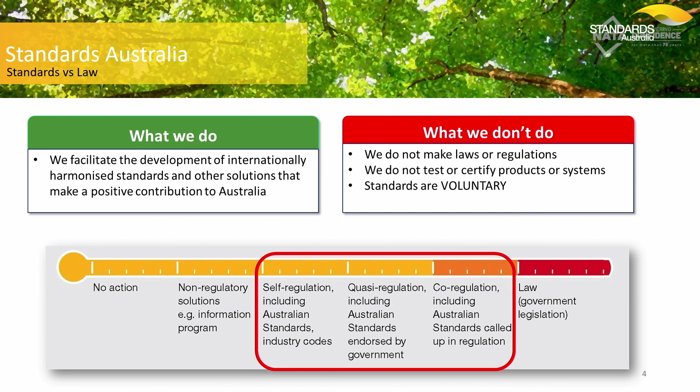For those who are unfamiliar, the National Construction Code is the building and plumbing codes of Australia. In it, we've got over 200 reference standards, the majority of them Australian standards and some international standards as well. This is a perfect example of co-regulation, where standards are actually embedded in regulation.

So why are standards important? The first reason is safety. Standards establish safety protocols for the production, usage, transportation and storage of hydrogen, and they ensure the protection of personnel, infrastructure and the environment.

Standards are also important when it comes to quality assurance, so they define specifications for things like hydrogen purity and hydrogen performance. This enables a reliable Australian hydrogen sector.

International alignment, and you'll hear me talking about international alignment a fair bit, but it ensures compatibility with the global supply chain and facilitates trade with our major trading partners.

And finally, market confidence. Standards instill confidence in investors, consumers and regulators, and by adhering to established standards, the hydrogen industry can build a robust and trustworthy market.

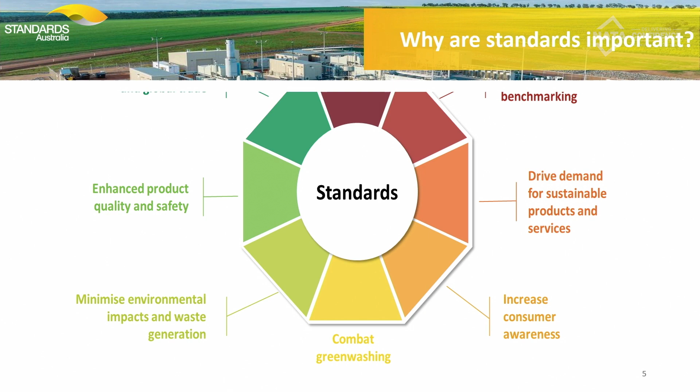So looking at the state of play with hydrogen standards in Australia and what we're doing at Standards Australia. ME93 serves as Australia's National Technical Committee on Hydrogen Technologies.

Now, ME93 also serves as a mirror committee to the International Committee for Hydrogen Technologies. This is facilitated by ISO, and this means ME93 serves two unique roles as that mirror committee.

The first role is that the experts on ME93 travel internationally. They represent Australia at the International Standards Development Table, and they actually sit at the table while the international standards are being developed and drafted.

And this is a segue to the second role, which is that once those international standards are developed, ME93 then review the standards to adopt them in Australia. There'll be a slide coming up which shows the hydrogen standards we've adopted and developed so far, and you'll see the overwhelming majority of standards in our portfolio are those that are adopted.

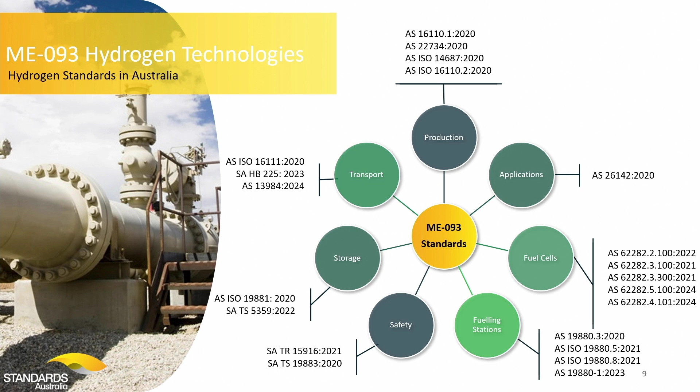I want to focus on one of our own specifications, something we haven't adopted from ISO. You'll see it under storage there: Standards Australia Technical Specification 5359. Apologies, I hate talking in standard designations and codes, but that's how our standards are referenced. The title is The Storage and Handling of Hydrogen.

Standards Australia published this document late in 2022, and it was Australia's first national hydrogen specification, and at the time it was also the world's first standalone document on the storage and handling of hydrogen. So a major achievement for Standards Australia, but also a major achievement for the Australian hydrogen sector. I think even in the international standards landscape, this really put Australia on the map.

There are some other critical standards being developed internationally, and I'd like to point your attention to this technical specification, 19870, which looks at the methodology for determining the greenhouse gas emissions associated with the production, conditioning, and transport of hydrogen to consumption. This is in line with ISO 14067 and the other ISO 14000 series you can see there on the bottom of the slide.

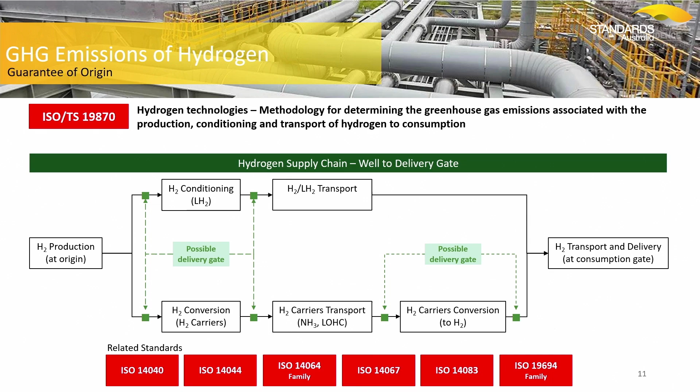Why this is important is because it dovetails quite nicely into the proposed Guarantee of Origin scheme, which is being designed by the federal government, which will provide a mechanism to track and verify emissions associated with hydrogen. So yet again, a perfect example of how standards can support proposed schemes and regulations.

The HyStandards tool. I'll spend a few minutes talking about this tool, and this tool could not be possible without the collaboration of both Standards Australia and the CSIRO. This is a central point of guidance for hydrogen standards in Australia, and it is a fairly comprehensive standards reference, and I'll have a graphic in a minute which just shows the breadth of standards we've collated for this.

The tool itself is actually hosted in CSIRO's Hydrogen Knowledge Centre, which was established by the CSIRO in 2021. This knowledge centre informs and develops a fairly robust hydrogen think tank here in Australia, and this tool will only add to that.

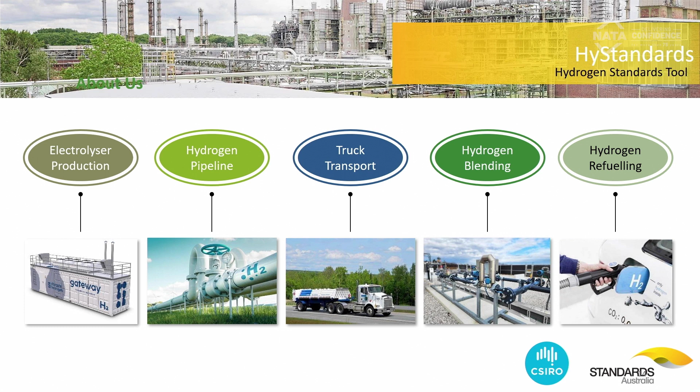With the HyStandards tool, we've gone for 5 scenarios, and these are the 5 scenarios that are most relevant to the Australian context. So we've got the electrolyser production of hydrogen, hydrogen pipeline transportation, road transportation of hydrogen, hydrogen blending, and then refuelling.

As you can see there, in collaboration with CSIRO, here are some of the standards or the areas of the standards we've collected. It's a fairly broad standards mapping exercise, and some of the standards here include Australian standards, joint Australian-New Zealand standards, international standards such as the ISO and IEC standards I've been referencing.

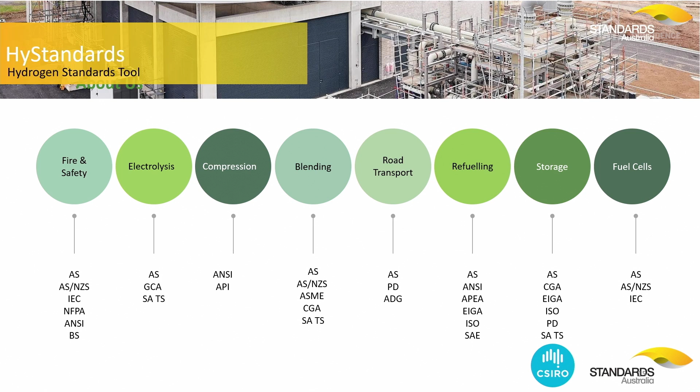We've also got some North American standards and some European standards as well. This talks to the importance of aligning ourselves internationally with other standards, because the majority of the standards that are currently out there are actually international standards themselves. I'll talk you through some of the key scenarios in this HyStandards tool, starting with the electrolyser scenario.

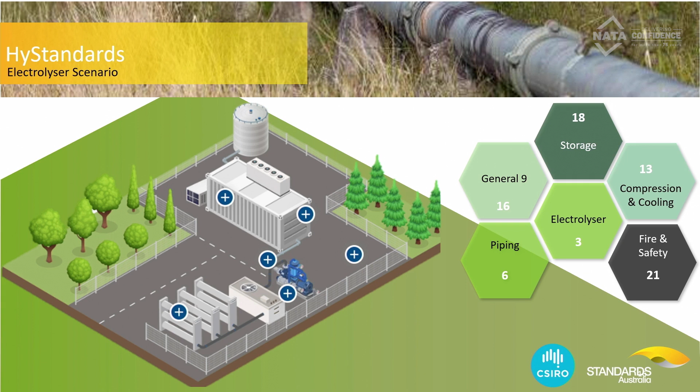As you can see, we've got the electrolyser itself, and we've got those two blue icons on the electrolyser, which identify some of the electrolyser standards that exist, but also some of the fire safety standards for electronic elements. From the electrolyser, the hydrogen is then transferred, it undergoes compression and cooling, and we've got the relevant standards there. Finally, the hydrogen itself needs to be stored, and we've got relevant gas and hydrogen storage standards from those standards we've mapped.

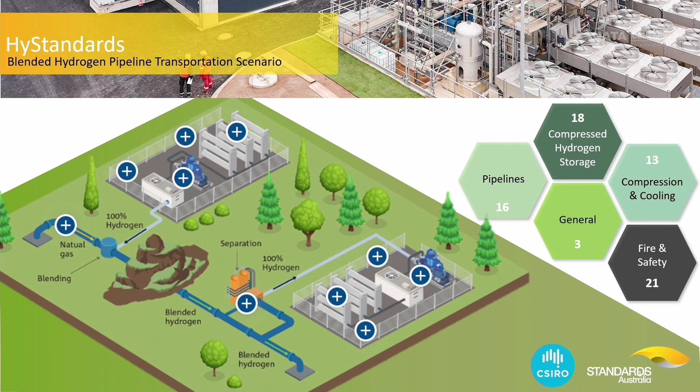Moving to the blending or hydrogen blended scenario, you can see the hydrogen and natural gas being blended and then separated. It then undergoes compression and cooling. So obviously with the different scenarios, we add and take away different standards depending on their relevance to the different scenario. The last scenario just focuses on hydrogen refuelling stations.

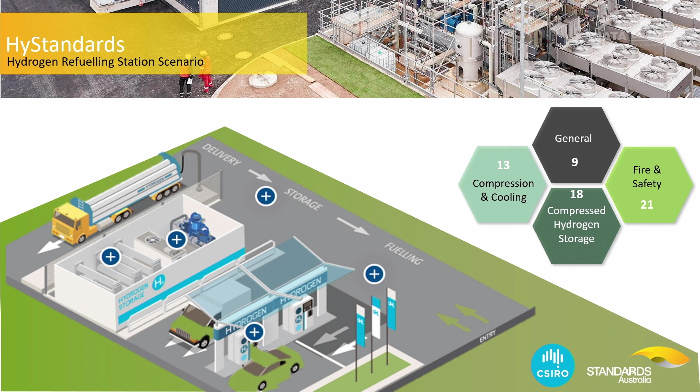So here you can see there's a focus on storage initially. We then go again to compression and cooling, and then there's some refuelling standards.

And I'd also like to zoom in on the refuelling scenario. We've got standards that look at some of the valves, some hydrogen car interface standards we've mapped, fuel quality standards, and other standards that look at things like hydrogen vehicle fueling stations, standards specific to those stations.

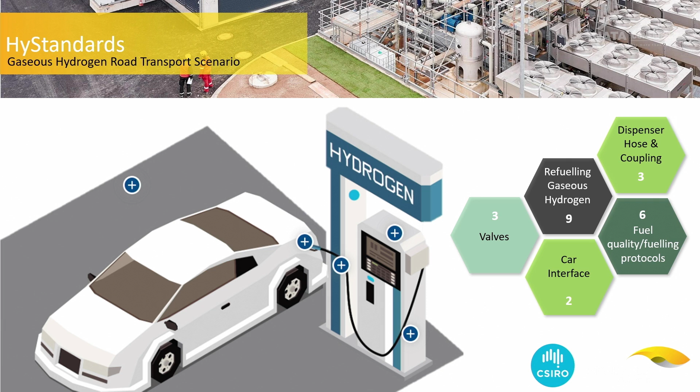So this is the HyStandards tool in a nutshell. It's important to note this is a first iteration of the tool. The tool will be updated as the sector evolves, as more standards are developed and adopted both nationally and internationally.

As I conclude, I'll have the QR code on the screen so you can access the HyStandards tool. Adopting and developing standards in Australia is not only essential for safety and quality, but also a strategic move to build confidence, drive innovation, and position Australia as a global leader in the hydrogen market. As I've discussed over the past 10 or so minutes, standards provide the necessary framework for a sustainable and prosperous hydrogen future, and they are a sure pathway to hydrogen accreditation.

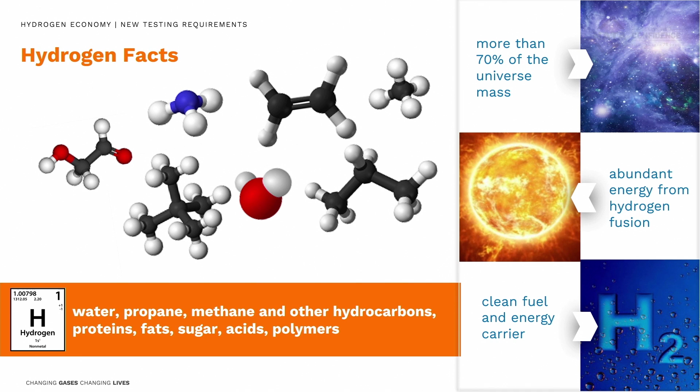So why are we suddenly talking about this? It's a very mature technology, very mature industry. It's used in huge quantities in hydrodesulfurization - refineries use hydrogen to remove sulfur from fuels. So if you want less polluting fuel coming from a car or truck, petrochemical companies use hydrogen to remove sulfur. The bad news for Australia is, for the last 20 years, we've been shutting down refineries, so there is less hydrogen in Australia in refineries this year than we had 10 or 20 years ago.

Ammonia production is one strong industry - we have a lot of ammonia production for fertilizers and explosives, for the mining industry, so this industry is doing very well. Again, it's the Haber-Bosch process, 80 years old, nothing new here. We don't have rocket fuels, but hydrogen is used as a fuel for rockets. Semiconductors - we used to have some semiconductor facilities, we don't have them anymore. We used to produce solar panels, we're not producing them anymore.

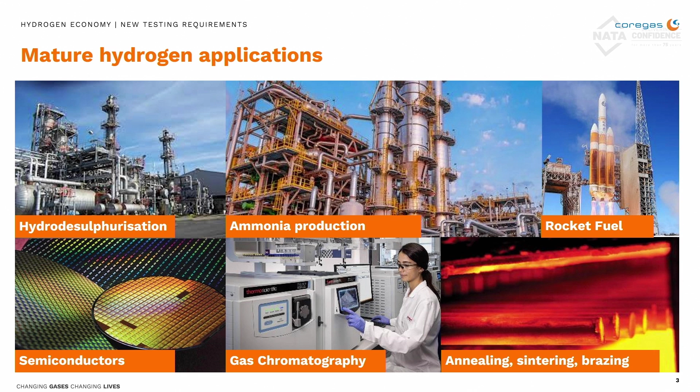Annealing, brazing, sintering - yes, we had it, but we closed the automotive industry. We are doing less manufacturing. However, laboratories and gas chromatography are still strong in Australia. So this is our major market.

So what's new? Why are we talking about this right now? Why the hydrogen rush? I think we can agree, after 10 years of debate, that we have global warming and the climate is changing. So as a response, different agencies, governments, and companies came up with the idea of decarbonization, and they see hydrogen as a path to decarbonize - not everything, but to decarbonize something.

One of the key areas where we should decarbonize is electricity, and we are doing very well in this space. We are putting in solar panels, we are putting in wind turbines. There's only one problem: how to store it. So that's where hydrogen comes into play as a clean energy carrier.

Different groups of interest are thinking about this - environmental change, energy storage, a greener grid, energy security, or economic development. Everybody has a different point of view, but I'll give you a clean example: South Australia. Electricity is owned by the state, so they decided to install a lot of solar farms and wind farms.

Now they have too much renewable electricity during the day, and sometimes they had to cut the roofs of the houses from the grid, because too much electricity is not good - it unbalances the grid.

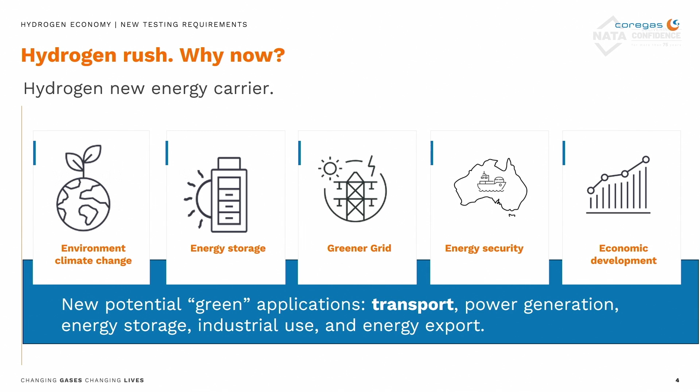Good luck - that's a very ambitious project, and I think it's a good example of how hydrogen can be used as energy storage and make the grid greener. And of course, economy - everybody's talking about jobs, jobs, jobs. So that's one of the key areas where the government is looking at hydrogen as a silver bullet solution for every problem we have.

State of hydrogen: I don't know if you heard about this, but $2 billion was allocated in last year's budget for the hydrogen economy. ARENA is managing that as a Head Start program. They got another $1.3 billion this year, with another $1.7 billion coming in the future under Made in Australia - hydrogen is part of it. On top of that, whoever can produce green hydrogen can get $2 per kilogram from the government until 2040. So guys, start making green hydrogen.

I don't want to dwell on this today because I'll be talking about testing of hydrogen, but I want to bring up another accreditation issue or challenge. If we're talking about green - we love the word green, it's probably one of the most abused or overused words right now. Everybody loves green. But our trading partners are moving away from the word green. They want to know the carbon intensity of the product they're buying from us - whether it's hydrogen or green ammonia, whatever - they want to know how many kilograms of carbon dioxide or equivalent gases were emitted during hydrogen or ammonia production. And that's where we are.

The Australian government and a few different agencies are working on something called a guarantee of origin, which is a very complex process. I hope we can have a discussion later about how to guarantee that something is green. I'll give you a simple example, and finish this guarantee of origin point here: if you bought a Tesla five years ago because it's a prestige car and it's green - that's great, congratulations. By the way, I'm driving an electric car myself right now.

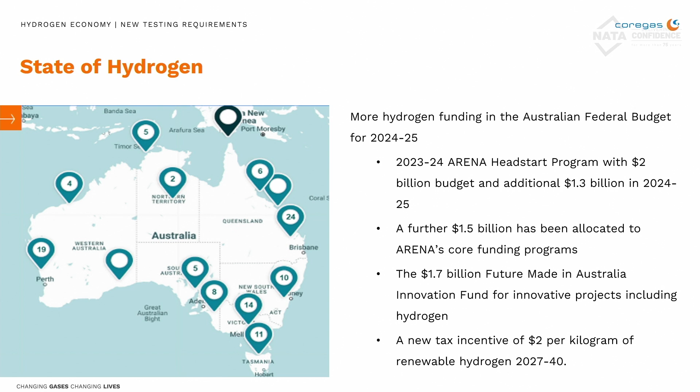That's why Japanese, Koreans, and even government are asking us, okay, prove how much emission is in the whole process of producing hydrogen. How are we doing? We are doing extremely well. We can congratulate ourselves. The carbon dioxide emissions are dropping significantly over the last 20 years.

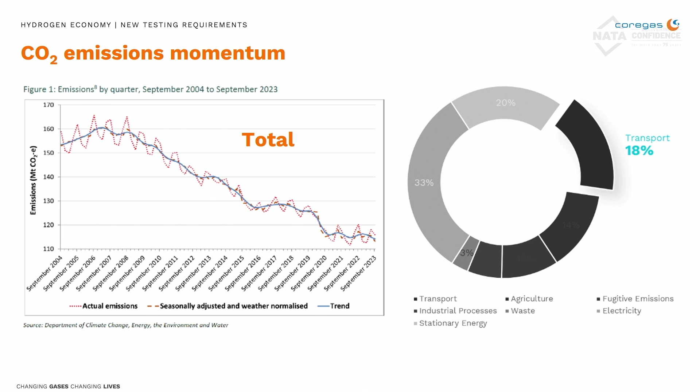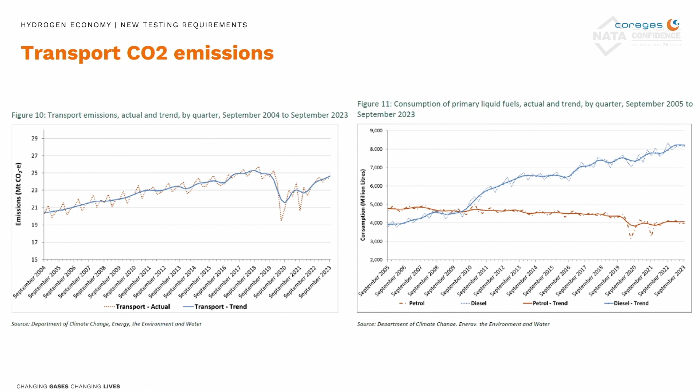Where we are not doing very well is heavy transport. This is diesel consumption - you see here we have significant growth. So what can we do? How can we change the situation? And this is - drums please - we have vehicles which are powered by hydrogen. We are calling them fuel cell electrical vehicles.

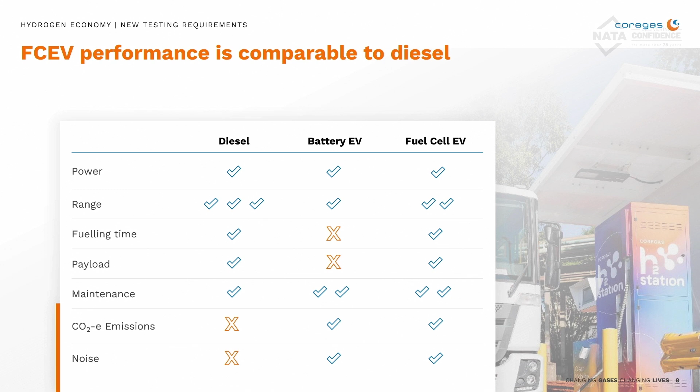This is a comparison of the benefits, cons and pros for different vehicles. As you see here, those vehicles are much better when it comes to emission in comparison with diesel. And they have much better refueling time and better payload than battery electric cars. So they're not really very good for passenger cars, because that's where the volumes are. But when you have a vehicle which is working many, many hours every day, or has to carry heavy load - like a truck going from Sydney to Melbourne - then the payload and hydrogen play an important role.

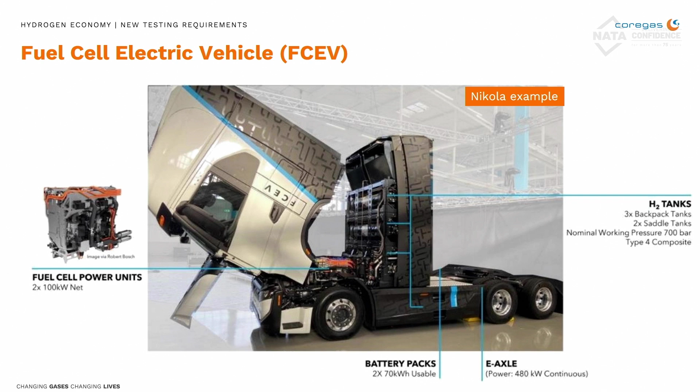So what we've done after that - we installed a hydrogen refueling system for Hyundai at North Ryde. That was the first hydrogen-powered car. Then we did funny things - we liquefied hydrogen and loaded it on a ship and sent it to Japan. And now the Japanese are working on a huge project, thinking, if this shipment was successful, maybe we can produce, let's say, 700 tons of liquid hydrogen per day, load it on a ship and send it to Japan. The project is around $10 billion, but that will be a lot of work and a lot of economic growth in Australia.

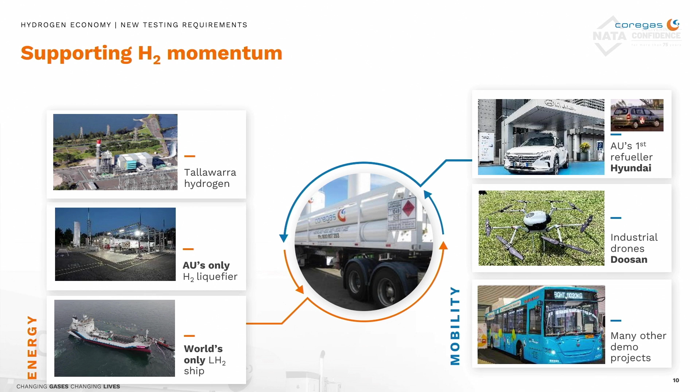So instead of talking about this, let's do something. We built a refueling station in Wollongong. I invite everybody who wants to see it, most welcome, it's inside the BlueScope site. I have to warn you, it's not much to see, just a dispenser. This is not magic, not a NASA rocket going to the moon. It's just a simple dispenser, nicely painted orange and blue, and a guy comes every day refueling the garbage truck.

They started in October. So the garbage truck in Wollongong is quiet because it's electric, zero emission, water is coming from the pipe, and it's picking up 1,200 bins every day and climbing Mount Ousley, if somebody knows this area around Wollongong. So I would say good demonstration.

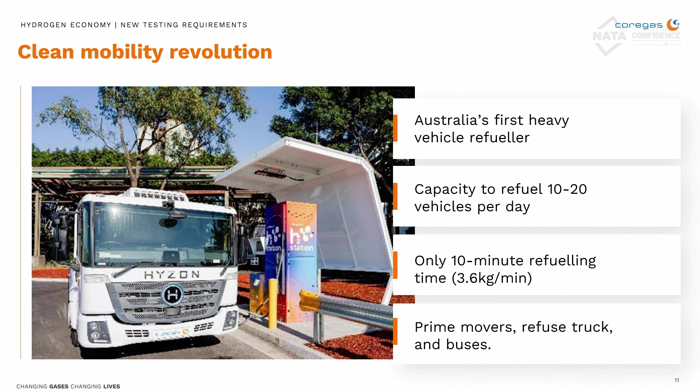And now I'm asking myself, what am I doing wrong? Why do we have only one? There are five under construction, but by the time they're installed, there will be another couple of years. So why are we doing wrong? Why can't we get those things moving faster?

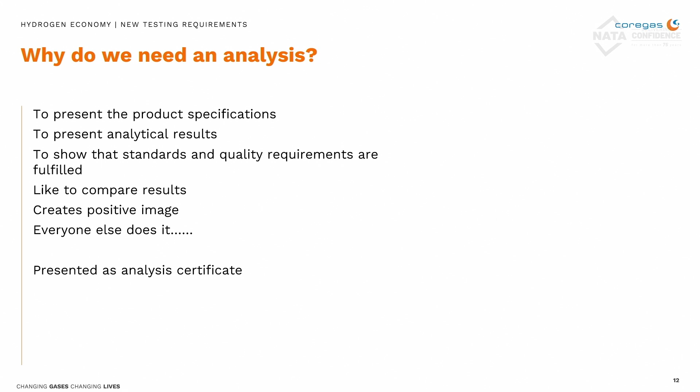Okay, analysis. Why are we doing analysis? This is a tricky one because it's for a probably bigger audience here. We have to present product specification and analytical results for all those industries shown before - ammonia production, burning, fat hydrogenation. The quality of hydrogen wasn't really that important before; 99.9% was fantastic. But now coming to mobility, suddenly there are critical impurities that can destroy the fuel cell. So we want to compare results, and everybody else is doing that.

So here, this is standard - Australian standard, I would say a copy of the international ISO standard. It's changing all the time, but this is some version here. As you see, currently we were supplying the past product on the right side, we call it 5.0, which was 99.999 purity. Now fuel cell heavy vehicles require only 99.97. But in comparison to what we've done in the past, where we had to analyze 3 components, now we have like 15 or 20, and some of them are extremely difficult, almost impossible to analyze, like sulfur at 4 parts per billion level.

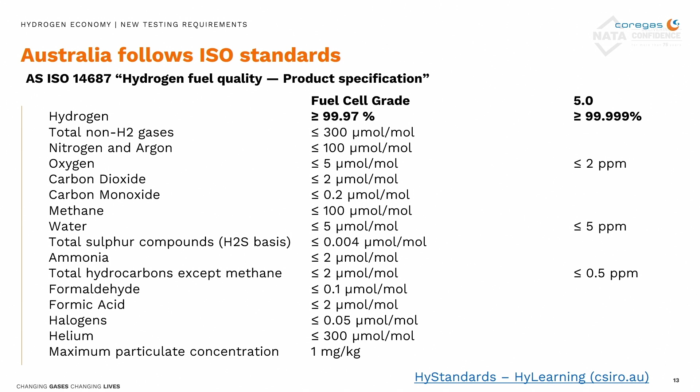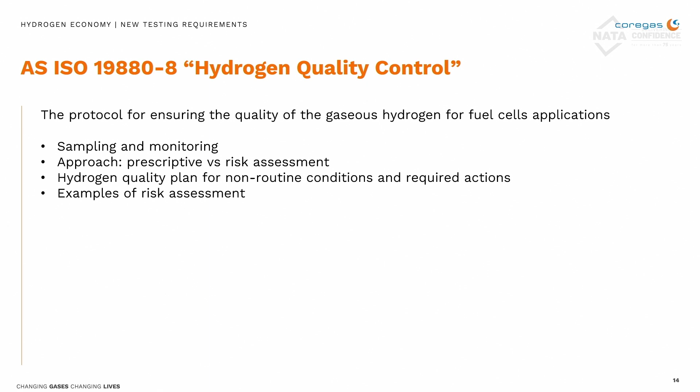So I'm putting a reference here for HyStandards - you can read this, see references, get a full print of this standard. But keep in mind, this standard only talks about what the purity of the gas should be, or what impurities should be. However, there's another standard you should refer to, which talks about hydrogen quality control. Because this standard tells you, if you're producing hydrogen using electrolysis, you don't have to worry about sulfur, because it's very unlikely, almost impossible, that you'll get sulfur coming out of water electrolysis. So it's very important that if you're in the space of hydrogen analysis for fuel cell application, you refer to this specific standard, published about a year ago, for what kind of quality control process you need.

And now coming to the last slide, this is the conclusion. I already talked about guarantee of origin - that was the first thing I mentioned, which is kind of outside of our scope, and we have to wait for the federal government to come up with the template, the guidelines, the rules, and accreditation. I'm sure at some point somebody will be auditing those certificates, and I'm sure NATA will get involved.

There's another thing we're not really thinking about right now, which is measurement of quantity. When you go to the petrol station and look at the digits ticking - okay, 65 liters - I said, really, 65? I thought my capacity was only 62. How did I put 65 liters in my car? Okay, accuracy of measurement. I understand liquid is much easier, liquid at low pressure is much easier to measure, but still every flow meter on the pump has to be calibrated sometimes by an accredited lab.

For hydrogen, I'm assuming measurement standards will be done as well. But the problem is we are pumping hydrogen to the truck at 700 bar. This is the lightest gas, so a few years ago it was impossible to get a mass flow meter which would measure it. You can't have a turbine turning at 700 bar, so you have to find different methods of measuring. Those methods are coming, but you can't get the same accuracy as you can on the petrol pump.

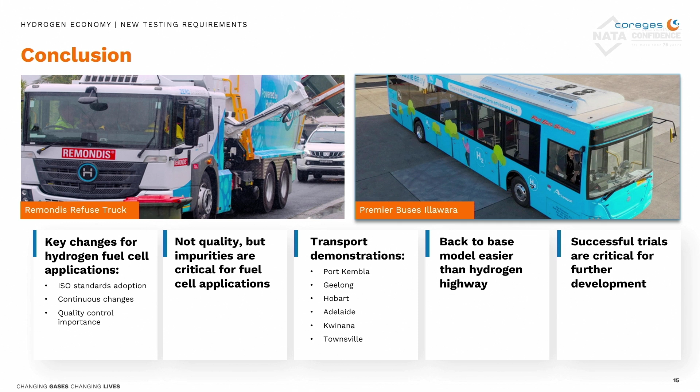We personally believe the back-to-base model is much easier than highway operation, because you don't need a public refueling station — you refuel yourself at your depot. What's very important, and we are engaging everybody we can on this, is that successful trials are critical for further development. If there are any failures, accidents, or incidents, a lot of people will say, 'we told you it's not going to work.'